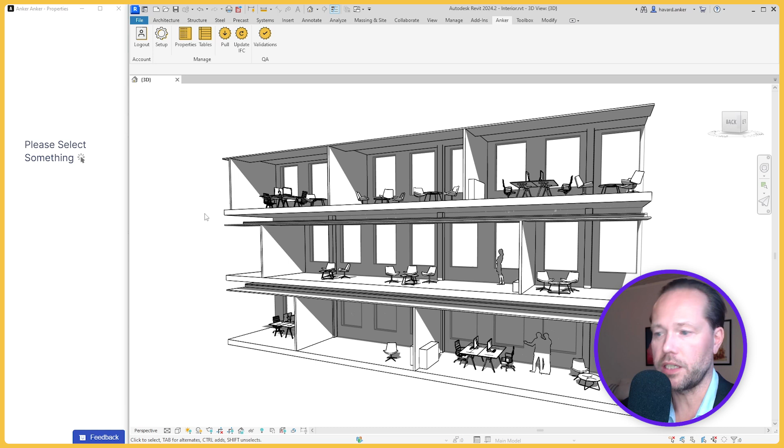So I want to show you how you can do that with Anker. It's very, very simple, almost embarrassingly simple, but hang in there and let's get through the embarrassment together.

I've opened an Anker property, just selecting a wall and looking at the data that's on this wall in the Anker database. I've got something like completion lead, complex number. Complex number in this case is probably as close to a project number as you're getting.

So this number actually means something for the building owner. Same thing here, delivery lead - this is actually a contract number. So the contract number K201 is referring to a contract basically for a discipline, and it needs to be filled in on every single element in the deliverable.

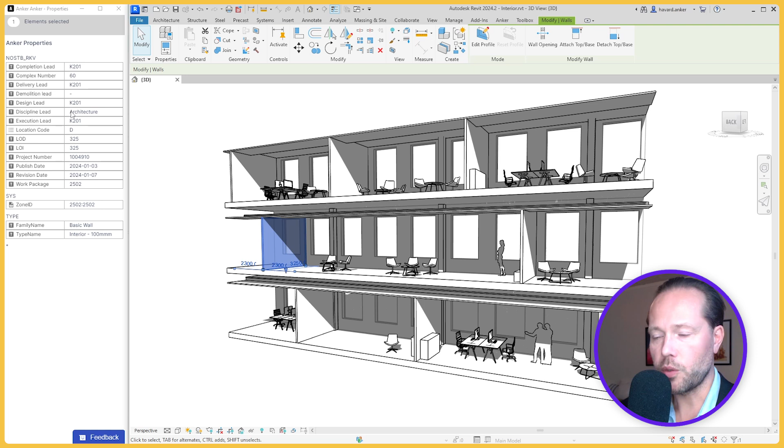So the way we do this in Anker today - I'll use a very simple example. Let's take this wall here and copy it, over here maybe. So in this case I'm adding a new wall, and when I click on it, I haven't saved my file yet, so there's no data on it.

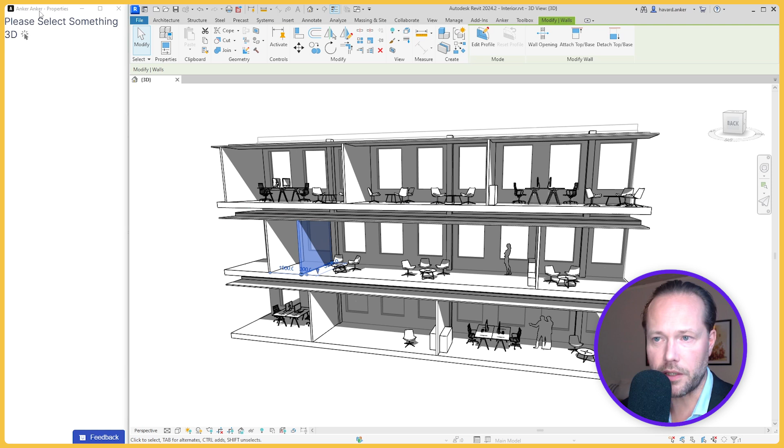The key here is that when I save my file and push my changes, this new wall goes from the local file to the central file, and then on to the building owner, contractor, construction site and so on. It is extremely important that the data that needs to be on that wall gets on that wall. So in this case, I'm clicking on it and you can see some of this data starting to appear - complex number, LOD, LOI, project number, and published date.

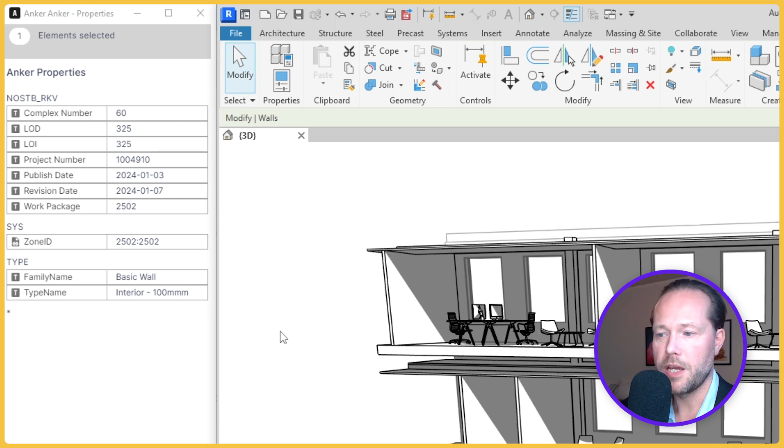Some of this data is written in different ways based on different logic, but the complex number is one property that's actually written to every single element in the entire project. Remember I clicked on this wall and it had a long list of data - if I click on this wall now, oh wow, look, there's a bunch of new data. So in the background, while I was talking, the Anker database was creating all this data for this wall.

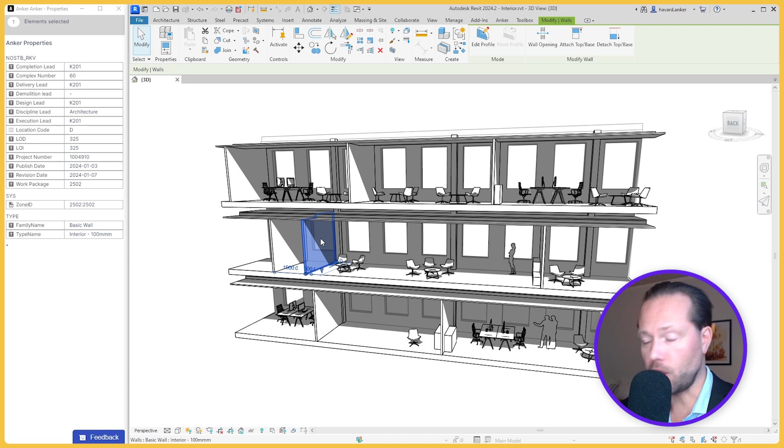All I had to do was save the Revit file, and then a bunch of rules executed that wrote that data for me. That means that at any point in time, anyone can export this file to the owner or the contractor, and the data is going to be attached to that element.

So this is all it takes. With this setup intact, you can deploy this workflow to your entire team. It doesn't really matter how many architects and engineers are working on your project, but whenever they push new elements to the central model, it will trigger these rules and auto-create a bunch of information that is vital for your owner.